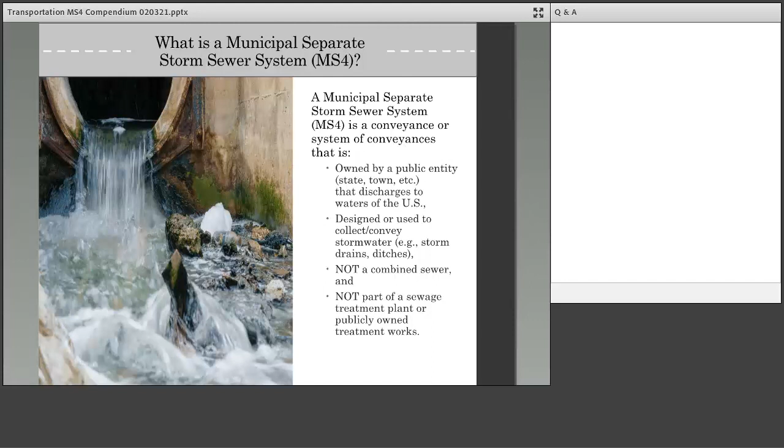A municipal separate storm sewer system, or MS4, is a conveyance or system of conveyances that is owned by a public entity, state, town, etc., that discharges to waters of the U.S. and is designed or used to collect or convey stormwater, for example, through storm drains or ditches. An MS4 is not a combined sewer and is not part of a sewage treatment plant or publicly owned treatment works.

It helps to know a little bit about how MS4 stormwater discharges are regulated. In 1990, the Phase I Stormwater Regulation was published. It requires medium and large cities or certain counties with populations of 100,000 or more to obtain NPDES permit coverage for their stormwater discharges. The 1999 Phase II Stormwater Regulation requires small MS4s in census-defined urbanized areas, as well as MS4s designated by the permitting authority, to obtain NPDES permit coverage for their stormwater discharges. This includes non-traditional MS4s, such as Departments of Transportation, or DOTs.

Most Phase II MS4s are covered under general permits, with some exceptions where individual permits have been used for Phase II and non-traditional MS4 permittees, including DOTs. Phase II MS4 permits include terms and conditions that address what are known as 6 minimum control measures, or MCMs. The MCMs include measures such as construction site stormwater management and good housekeeping. Phase II permits also address annual reporting requirements and other requirements as appropriate for the protection of water quality.

You may be wondering which entities actually hold transportation MS4 permits and under what part of the MS4 regulation are they permitted. Well, it varies. Some stormwater discharges from roadways, including all of those within defined urbanized areas, are covered under NPDES MS4 regulations. Departments of Transportation may be co-permittees with Phase I MS4s under a Phase I permit, and DOTs may be small MS4s, as defined by regulation, under either an individual or general Phase II MS4 permit.

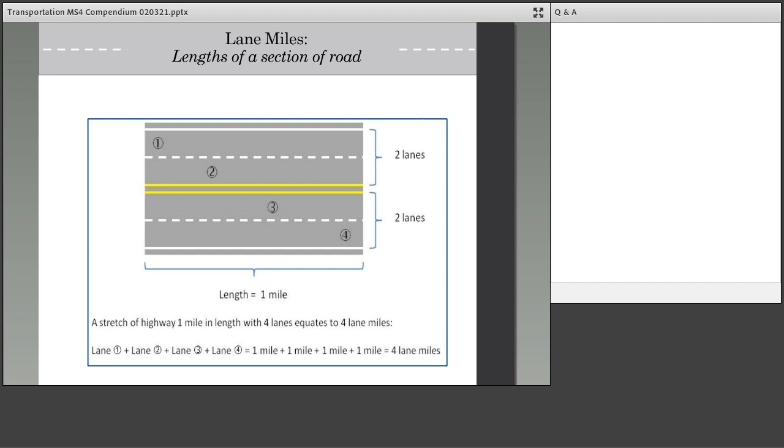Each state permitting authority may classify new development, redevelopment, and roadway repair and improvement activities differently. DOTs typically classify their activities into new construction, reconstruction, rehabilitation, resurfacing, restoration, and maintenance. Because of these differences that can occur, we've seen it's very helpful when state permitting authorities and the transportation agencies work together to make sure they are talking the same language.

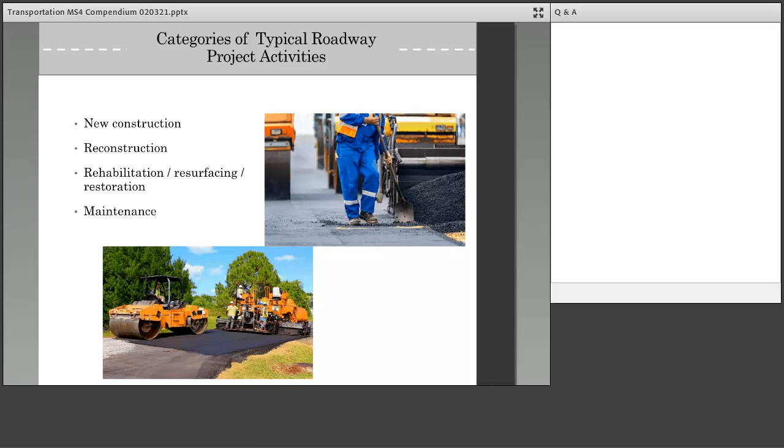Transportation agencies often incorporate stormwater facility maintenance into larger asset management and operations and maintenance programs, or, in some cases, track and execute a standalone stormwater facility maintenance program. Stormwater facilities include, but are not limited to, catch basins, detention basins, filter strips, riparian buffers, infiltration trenches, sand filters, constructed wetlands, wet ponds, bioretention systems, low-flow bypasses, and stormwater conveyances.

We won't be covering every single topic area in the compendium or every single topic area in an MS4 permit. We've just chosen a range of areas to give you a sense for the breadth that the compendium covers. We'll talk about what's notable about each topic in terms of what might be specific to transportation MS4s as opposed to other MS4s for that topic. We'll also talk about how transportation MS4 permit language could address the topic based on some examples from the compendium, though we won't show example permit language for each topic. You'll have to look that up in the compendium itself.

One topic the compendium addresses is establishment of the Stormwater Management Program, or SWMP. Here we'll talk about several subtopics of SWMPs, such as the first one here, legal authority. An overarching legal authority framework must be established in order for an MS4 permit SWMP to be effective. Permittees must have the authority to carry out all aspects of their stormwater management programs, including requiring the control of pollutants flowing into the MS4 system, having access to inspect sources of pollutant discharges, and being able to compel compliance and issue citations in the event of violations.

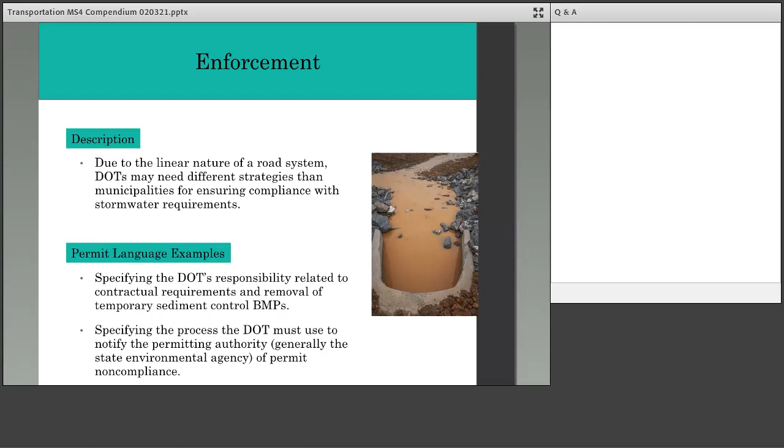DOTs may use encroachment permits and, as mentioned earlier, may utilize the State Highway Patrol or police to deal with major stormwater issues. There are examples of permit language in the Compendium that specify the DOT's responsibility related to contractual requirements and removal of temporary sediment control BMPs, or best management practices, and that specify the process the DOT must use to notify the permitting authority, generally that's the state environmental agency, of permit noncompliance.

An important aspect of the SWMP is interaction with the public. In fact, 2 of the 6 minimum control measures for Phase II MS4 permits are about interfacing with the public. One is public education and outreach, and the other is public involvement and participation. It's critical for MS4 permittees to include education and public involvement in the SWMP. An informed and knowledgeable community will help engender greater support for and compliance with the program.

There's flexibility in how these things can be addressed, so a DOT permittee may target outreach and education specifically to the traveling public. While a typical MS4 might focus on educational programs for school-age children or hiking trail signage on tributaries for hikers, a transportation MS4 might instead include targeted outreach to their traveling public in places that would reach them, such as outreach to pet owners at rest stops.

Permit language around public education and involvement could include provisions specifying that a DOT permittee may target outreach and education specifically to the traveling public, specifically identifying who the public is for the DOT, or listing specific target audiences to consider among the traveling public, for example, truckers, pet owners, garbage haulers, when they're developing outreach.

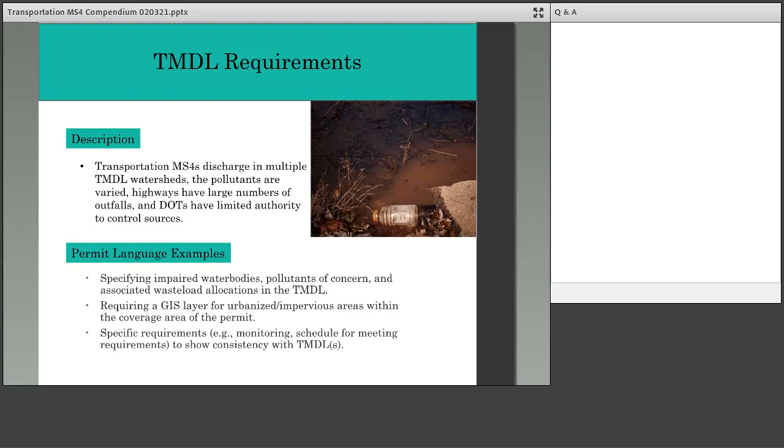As a side note, I want to point out that there are some additional resources available to MS4 permit writers that may be of particular use in situations where waters are subject to TMDLs. One is another document in the series of EPA's Compendia of MS4 permitting approaches that focuses on water quality-based requirements. And another is a National Cooperative Highway Research Program, or NCHRP, report called Approaches for Determining and Complying with TMDL Requirements Related to Roadway Stormwater Runoff. I'll include links to those resources at the end of the presentation.

Highway agencies spend more than $2 billion every year on winter maintenance. These operations often involve de-icing techniques and/or anti-icing techniques that use a variety of chemicals, such as salts, to prevent ice and snow from forming on roads or to remove it. Chloride-based salts are the most commonly used material for snow and ice control, followed by acetates. In 2015, nearly 32 million tons of salt were used for highway de-icing in the United States. That's 46% of 69.5 million tons consumed total.

Studies have shown an upward trend in freshwater chlorides, which is thought to be the result of de-icing salt applied to roadways, parking lots, driveways, and sidewalks. The facilities where DOTs store these materials can also be sources of pollutants. For example, most de-icer abrasives are stored outside and are not covered. Uncovered salt piles can contribute significant pollutant loads to surface and groundwater.

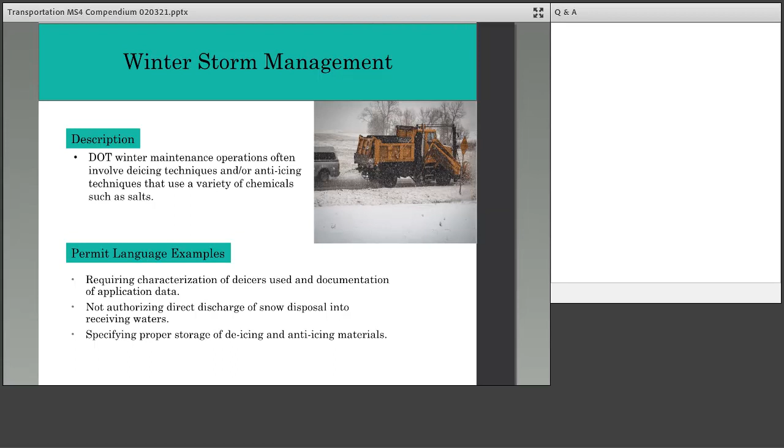Transportation MS4 permit language about winter maintenance can address points such as requiring characterization of de-icers used and documentation of application data, not authorizing direct discharge of snow disposal into receiving waters, or specifying proper storage of de-icing and anti-icing materials.

DOTs often have facilities other than roads that are covered by the MS4 permit. For example, parking lots, rest areas, and maintenance yards. Stormwater management considerations at these facilities may be different than those for linear roadways. Unlike municipalities, DOTs may lack the mechanism to incorporate pollution prevention and good housekeeping requirements into ordinances. MS4 permit language can address those sorts of requirements.

For example, it can require inventory of specific facilities, such as maintenance yard facilities, and related potential pollutant sources. It can describe facilities management best management practices, or BMPs. It can require developing standard operating procedures, or SOPs, for spill prevention and response. And MS4 permit language can require facility inspections to ensure indoor drains are sealed or go to sanitary sewers.

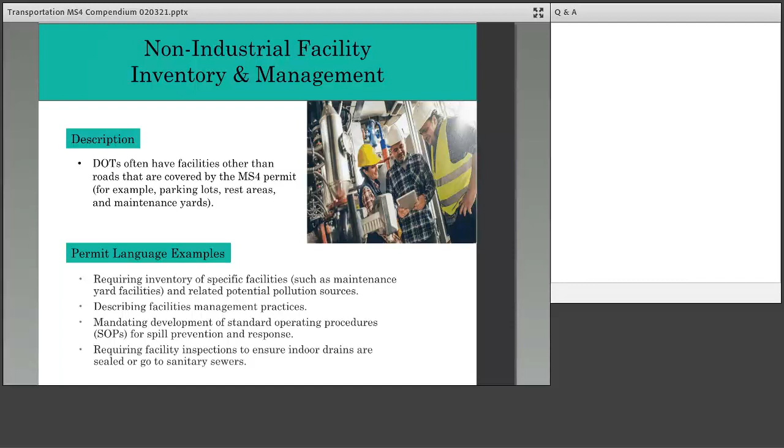DOTs often have hundreds or even thousands of catch basins, outfalls, inlets, and best management practices, or BMPs, to track, operate, and maintain. Maintaining everything, everywhere, on identical schedules may prove challenging. Therefore, many DOTs find it helpful to develop maintenance requirements that systematically prioritize schedules and inspections based on water quality and other criteria. The Compendium has an example of permit language that specifies catch basin inspection and cleaning frequencies.

This particular example specifies different schedules and numbers of catch basins that must be cleaned depending upon the number of catch basins that the highway agency operates. Permits can also address maintenance frequencies and schedules for other components of the stormwater system as well. This is just one specific example in the Compendium related to catch basins.

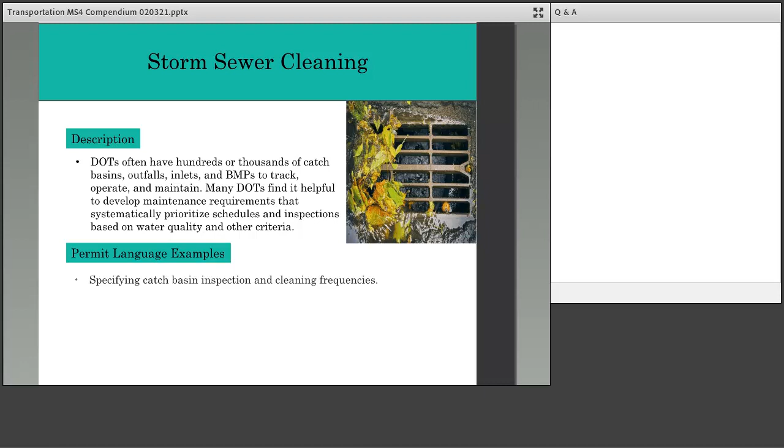DOTs are responsible for managing roadside vegetation for safety, for example, maintaining view of approaching vehicles and hazards, also for stormwater drainage, supporting pollinator habitat, managing invasive species, supporting aesthetics, and other reasons. DOTs need to make decisions regarding management, including mowing and using herbicides to manage invasive species and noxious weeds. MS4 permits can include terms that will support the DOT's management of roadside vegetation while also protecting water quality.

Permit language on vegetation management in transportation MS4 permits could include provisions establishing a minimum standard for herbicide application, requiring collection and disposal of unused vegetation management chemicals, requiring DOT contractors using herbicides be trained and certified, and specifying consultation with vegetation management experts, such as state university extension programs. For example, one permit in the Compendium calls for consultation with the state's Department of Agriculture and Consumer Services and the state university in selecting appropriate pest control methods and implementation practices.

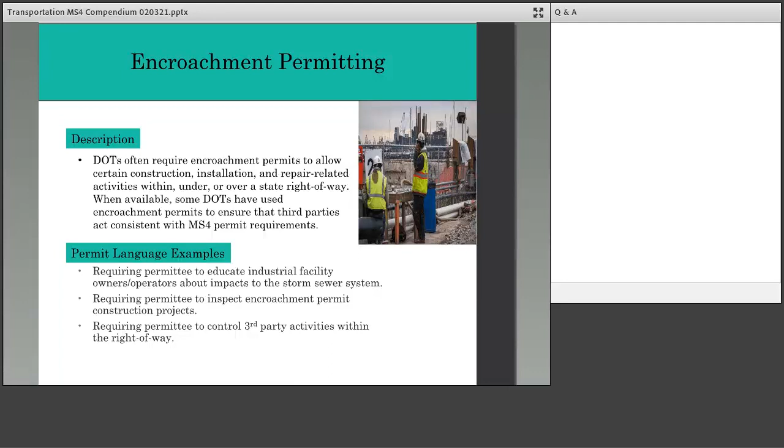DOTs often require encroachment permits to allow certain construction, installation, and repair-related activities within, under, or over a state right-of-way. When available, DOTs may use encroachment permits to ensure that third parties act consistent with MS4 permit requirements. Examples of permit language addressing this topic in the Compendium include excerpts that require the permittee to educate industrial facility owners and operators about impacts to the storm sewer system, require the permittee to inspect encroachment permit construction projects, and require the permittee to control third-party activities within the right-of-way.

The last few topics we'll mention today relate to project development. Let's talk about developing and planning highway projects in terms of stormwater management. Whether it's new construction, reconstruction, rehabilitation, or maintenance, highway improvement projects can potentially release various pollutants when it rains or snow melts. Anyone who's seen a construction site in the rain can understand the importance of good practices to manage stormwater pollution when so much soil is exposed.

DOTs often use advanced planning to determine ways to reduce discharges of these pollutants in stormwater and snowmelt during both active construction and post-construction, and they will also implement structural and non-structural practices to manage stormwater. The Compendium has an example of permit language addressing the stage of active construction and contaminated soils. The permit required the DOT to notify the permitting authority if it will be using lead-contaminated soil that qualifies as a hazardous waste under the state definition, and to comply with the terms of the variance that allows limited use of such soil.

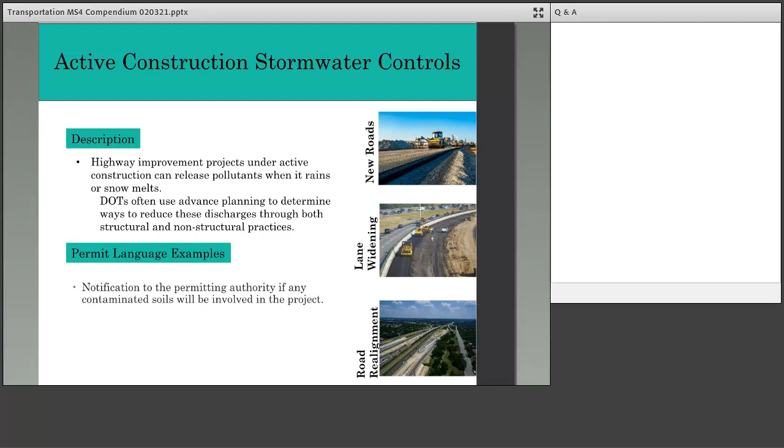After the active construction period ends, post-construction stormwater controls are important to reduce discharges of pollutants in stormwater and snowmelt. Phase I MS4s SWMPs must address controls to reduce pollutants in stormwater discharges after construction is completed on new and significant redevelopment. The Phase II regulations require regulated small MS4 operators to develop, implement, and enforce a program to address stormwater discharges from new development and redevelopment sites that disturb greater than or equal to 1 acre of the MS4.

The regulations also require that the MS4 ensure that control measures are installed and implemented that prevent or minimize water quality impacts. Permit language for post-construction stormwater controls in transportation MS4s includes identifying specific standards that apply to development and redevelopment, and including links for easy access, performance standards for post-construction controls, including specific thresholds based on imperviousness and disturbed area, requiring development of a best management practice, or BMP, toolbox, or prioritizing specific types of BMPs, or green infrastructure.

And I'm going to get a little bit more into green infrastructure in the next few slides. A couple more remarks here on post-construction before I talk more about green infrastructure. The first is regarding terminology. Post-construction, in the context of an MS4 permit, specifically means post-construction stormwater control measures. However, some DOTs have indicated that maintenance crews may automatically affiliate the term post-construction activities with activities like mowing grass, simply because they also happen post-construction of the facility. It may be helpful to clearly define whatever terms are used so that the terminology is not lost in translation with the people actually implementing the post-construction stormwater control measures.

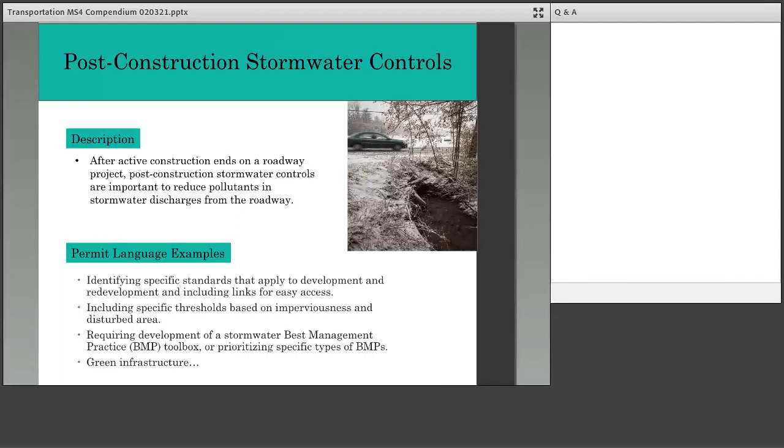I also wanted to mention that the American Association of State Highway Transportation Officials, or AASHTO, Center for Environmental Excellence, summarized input from a national meeting of DOT stormwater practitioners that discussed approaches to incorporate post-construction BMPs in the project delivery process. They recommended a few practices to help meet permit compliance and protect infrastructure. These included assigning a lead management position to oversee and ensure communication between workers and management during each phase of the project delivery process, involving maintenance personnel early on in the design process and justifying the use of certain BMPs, and incorporating state-specific standards and highlights into proposed contracts.

One thing to think about when planning for post-construction stormwater controls is the opportunities that roadway projects have to incorporate green infrastructure. So what exactly is green infrastructure, and what's the difference between green and gray infrastructure? The answer to that question is a matter of intent and function. Gray infrastructure is designed to move stormwater away from the built environment. For example, conventional piped drainage and water treatment systems. By contrast, green infrastructure uses plants, soils, and other media to capture, treat, and evapotranspire stormwater at its source.

Green infrastructure is a cost-effective, resilient approach to managing wet weather impacts that provides many community benefits. Green infrastructure reduces and treats stormwater at its source while also delivering environmental, social, and economic benefits. It uses vegetation, soils, and other elements and practices to restore some of the natural processes required to manage water and create healthier urban environments. In case this sounds really familiar but you don't recognize the term green infrastructure, I should mention here that different entities call green infrastructure by other names. For example, low impact development, or LID, or green stormwater infrastructure, or GSI.

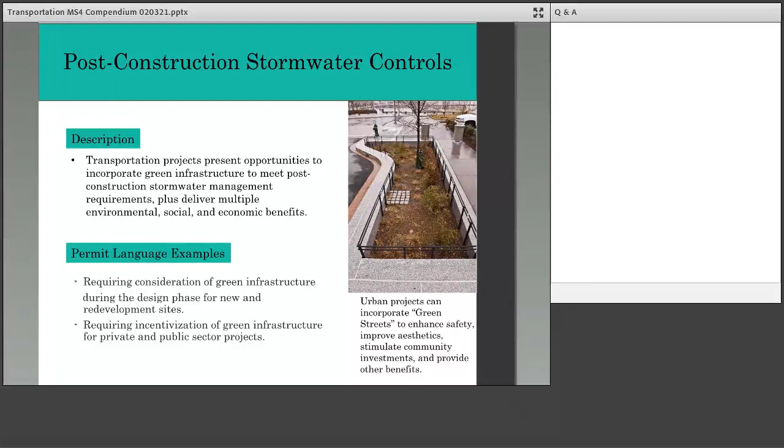For example, some permits require permittees to assess current regulatory mechanisms and identify implementation barriers and opportunities for improvement. Some permits also include requirements to implement green infrastructure practices and conduct inspections and maintenance on those practices. Some require permittees to develop and/or implement post-construction performance standards and green infrastructure plans.

Another thing to consider during project development is that MS4 permits or other local or state stormwater management goals often have flexibilities to meet post-construction stormwater standards that account for site-specific conditions and other factors. One such flexibility is called off-site stormwater management. A note on vocabulary here, this concept is sometimes referred to as off-site mitigation, off-site crediting, or watershed-based planning.

When roadway projects make improvements to reduce water quality impacts, the improvements most often occur within rights-of-way along existing alignments. Opportunities to limit stormwater impacts can be challenging, as land within the existing right-of-way is not always available or practicable for the construction of structural post-construction stormwater controls. For example, a project site may be steep or rocky, or maybe a bridge. Redevelopment projects in dense urban areas may also face space constraints and constraints due to the existing placement of utilities.

In addition, stormwater management practices installed years ago in the right-of-way may not have been designed to adequately meet more recent water quality requirements included in NPDES permits, TMDLs, or effluent limitations. In these and other scenarios, on-site stormwater management practices may be too impractical or costly to instate.

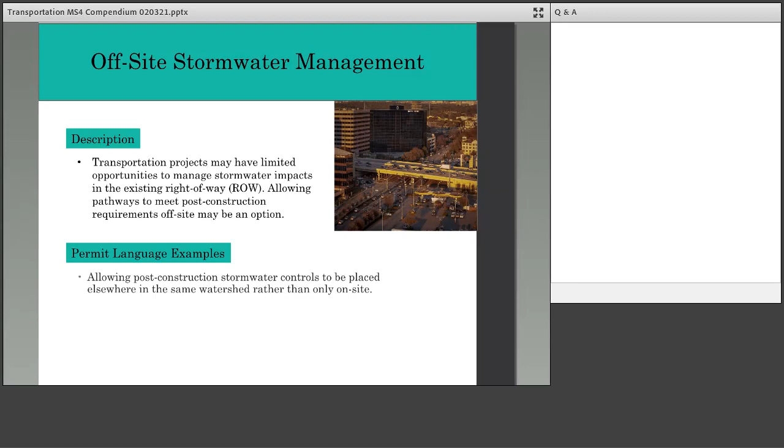Some transportation project developers have chosen to fund off-site restoration projects such as stream or wetland restoration to help meet post-construction stormwater requirements related to water quality, such as sediment or phosphorus loadings. Transportation MS4 permit language could specifically allow for construction of post-construction stormwater controls elsewhere in the same watershed rather than only in conjunction with the development project. The permit language could then point to specific information related to the relevant DOT or state environmental agency's program if they have an established structure or program for off-site stormwater management.

The last topic from the compendium that we'll touch on today is monitoring and evaluation. Assessing the effectiveness of the stormwater management program allows the MS4 permittee to track progress in complying with permit provisions and identify which parts of the program need to be modified to protect or improve water quality. There are different monitoring and evaluation requirements depending on the type of permit. Phase I MS4s are required to develop a monitoring program, characterize the discharge, do field screening, and to assess their controls. Phase II permits may also include monitoring.

For MS4s that contain monitoring requirements, each monitoring program is unique and should be customized to specific pollutant sources of the MS4 and the receiving waters. In the case of transportation MS4s, the program should be tailored specific to the pollutants and pollutant sources that are most pertinent to the roadway context, like we saw in earlier slides. For example, considering the chloride from de-icing and anti-icing salts and the zinc from tire wear, motor oil, and grease.

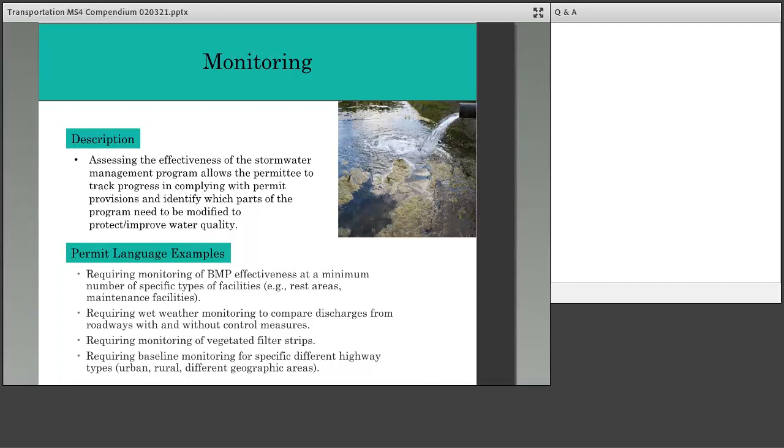Transportation MS4 permit language could require monitoring of BMP effectiveness at a minimum number of specific types of facilities, for example, rest areas and maintenance facilities. It could require wet weather monitoring to compare discharges from roadways with and without control measures. It could require monitoring of vegetated filter strips, or it could require baseline monitoring for specific different highway types, so urban, rural, and different geographic areas.

We've gone through several examples of permit topics that the transportation MS4 permits might handle differently from other MS4 permits. I highlighted some of the more notable examples, but there are other topics addressed in the compendium as well. For each topic, there's at least one and sometimes many permit language example excerpts to illustrate how some permitting authorities handle the topic. Before we end the presentation part of this webinar, I wanted to show you an actual example of what the excerpts look like in the compendium document.

Each example starts with a table showing effective date, permittee name, citation, and link to the permit. As for the citation section, note that citations are to EPA stormwater regulations and are not intended to be a comprehensive listing of possible legal authorities that could support a particular permit condition. Each permit example includes a citation to the relevant provision or provisions of Phase I regulation and Phase II regulation. In addition, the Phase II stormwater regulation includes guidance paragraphs. These are not legally binding, but they can guide permit writers on developing permit conditions. If a guidance paragraph is cited, it is clearly marked as guidance.

Below the table with basic information is excerpted language directly quoted from the permit. Note that in some examples, EPA has included surrounding language from the permit to provide context. A note about permit language here. Permits that include specific deadlines for compliance, incorporate clear performance standards, and include measurable targets for implementation enable the permitting authorities to more easily assess compliance. Similarly, they give permittees and the public greater transparency with respect to what actions are necessary to achieve compliance. Phase II MS4 permits are specifically required by regulation to include terms and conditions that are clear, specific, and measurable.